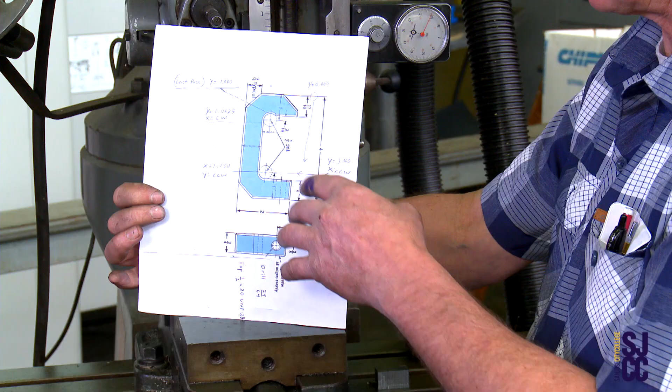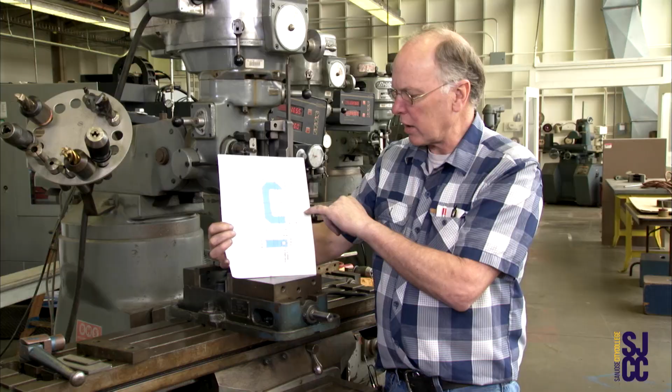Okay, welcome back. There's a couple things that we need to discuss before we go to cut this thing. On the print, I've actually made some notes on my print of the X0 and the Y0 where I wanted to be. And you want to come down in Y 3 inches, and then you want to go X counterclockwise, or some people call it anti-clockwise, but counterclockwise is the way you want to turn the handle to go that direction.

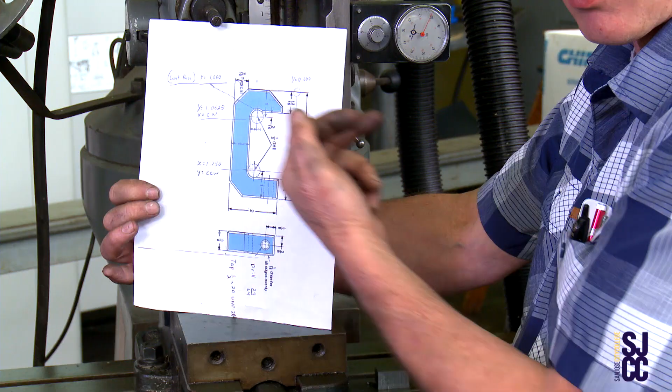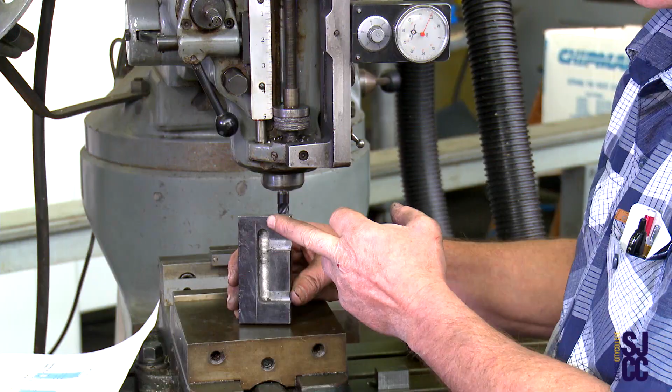And then when you get to X 1.250, you want to take the Y-axis and go counterclockwise to go up all the way to 1.0625, and then X-axis clockwise on the way out. Make all these notes on your print, that way you don't have any mistakes made, such as this one here, where somebody just kept on going, and it was a mistake and it ruins the part. So from that point on, we're going to go ahead and start cutting.

Okay, this is part 2. We're going to start cutting this. There's a couple things that you need to know before you start cutting. Your depth of cut cannot be more than half the cutter, and I'm using a 1/2 inch cutter. I want to leave a little bit for a cleanup cut at the very end, so I can make nice clean edges.

But with the depth of the cut, you don't want to go all the way down at one time. You want to leave a little bit at the very end, otherwise the piece will start wobbling around and it'll break a cutter or something. So you want to just take nice cuts and make nice clean passes. So we're going to take a little bit of a cut here and see what happens. I'm leaving 50 thousandths for a cleanup pass. Always lock the axis that you're not using.

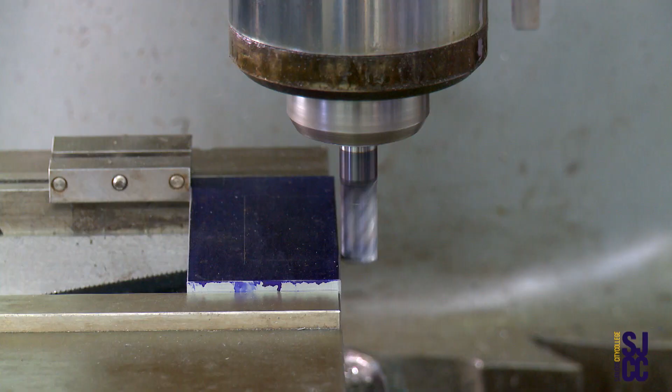I'm going to come in, watch the DRO. I'm going to come in to 1 inch 200. I'm going to lock the X-axis. I always cue up the Y-axis and then go the other way. I'm going to go to 1.100. Unlock the X and come on out. Then you just start making successive cuts and bring it down until it's done.